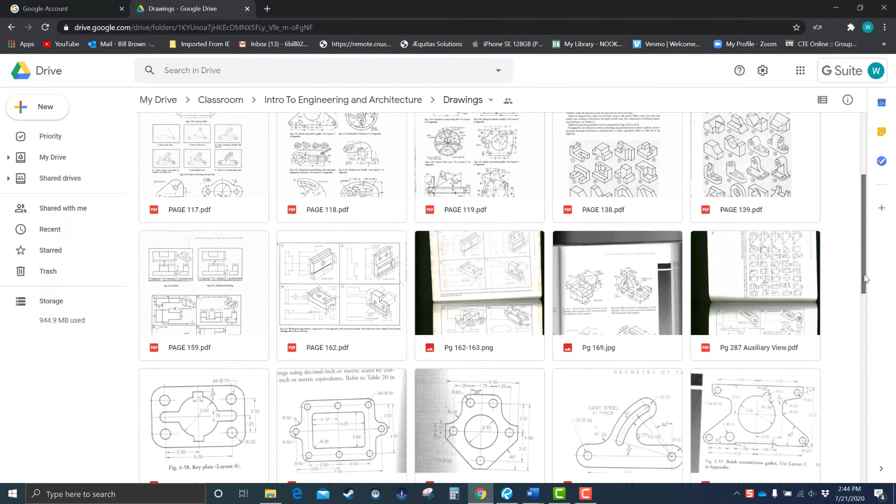As you can see from my screen here, I'm on the Google Drive. I've got a picture of it in here somewhere. It'll say S2, the Key plate. You can see it right here. Sometimes that comes out kind of small, so I've also got this as a PDF.

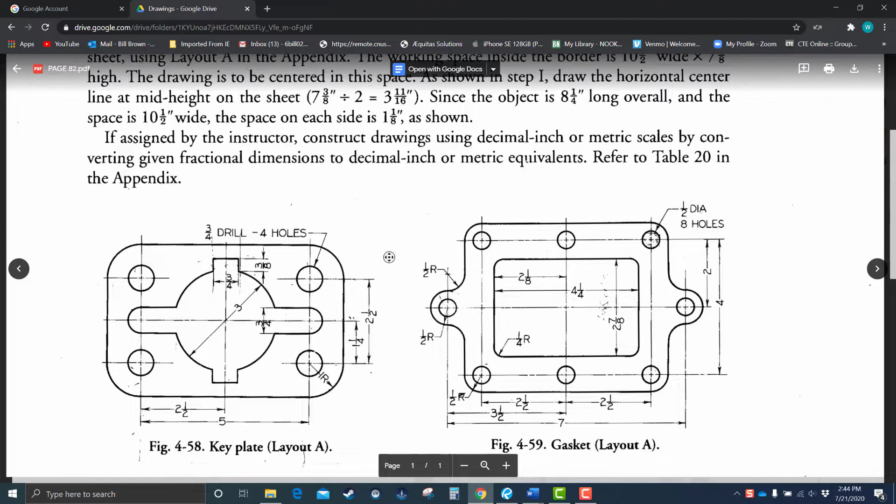So if you go to page 82 on the PDF, I'm going to open it that way because I have the ability to scale and move around here. So when I open the PDF, I can zoom in on that thing and pan around. I'm not panning around very well right now. Let's see... there we go. Okay, so I'm not used to the software.

All right, so we're going to do the Key plate right here. Pretty easy to see here. The numbers are there just to help you with the proportions and stuff like that. So here we go. I'm going to kind of go back and forth with the picture here.

So let's go ahead and get into the software here. So this is the assignment sheet. So this will be what you're looking for right there, the S2.

All right, so let's see. Let me just zoom out just a little bit here. Okay, so if we look back at the part, you're going to notice that it has a natural center point to it. If you look at the part here, we're going for this bullseye right there. So it does have a natural center right there, and we're going to use a center line to do that.

So let's go ahead and pop in here. What I'd like you to do, use a 0.5 or 0.7 here. I would use a 0.5 pencil on this. So I've got my 0.5 right here, and I'm just going to find the middle of the paper.

And we're just going to make a nice light vertical line here, nice and light. You just want it reasonably straight, doesn't have to be perfect. If you don't overthink it, it should be equal on both sides.

And then we're going to do the same thing going horizontally. So we're going to make a line right down the middle there, really, really light, just so you can see it there. Okay, just like that. So that would be our natural center point of the part.

So again, that's our bullseye kind of right there. Now this part has a series of bullseyes, and that's kind of the way we're going to set this thing up. We're going to proportion it, if you will. So what we see right here is a 2.5 and a 5, which means it's 2.5 one way and 2.5 the other. Now we're not going to measure—this is a sketch, but we're going to use these as proportions. So that said, let's go ahead and do that.

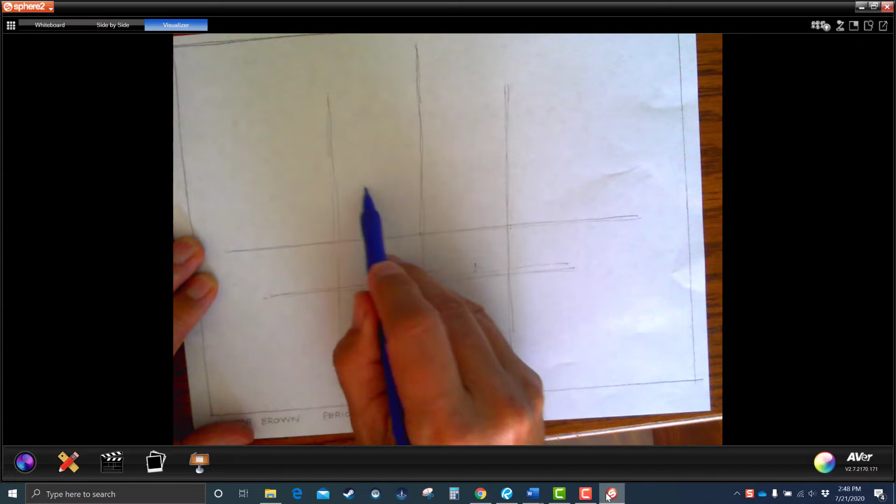Something about like that—it's your job to check does that look like it's about half of that? If it looks pretty close, you're in good shape. And if it doesn't look good, if it looks too much like a square, then you need to change your proportion and get this right.

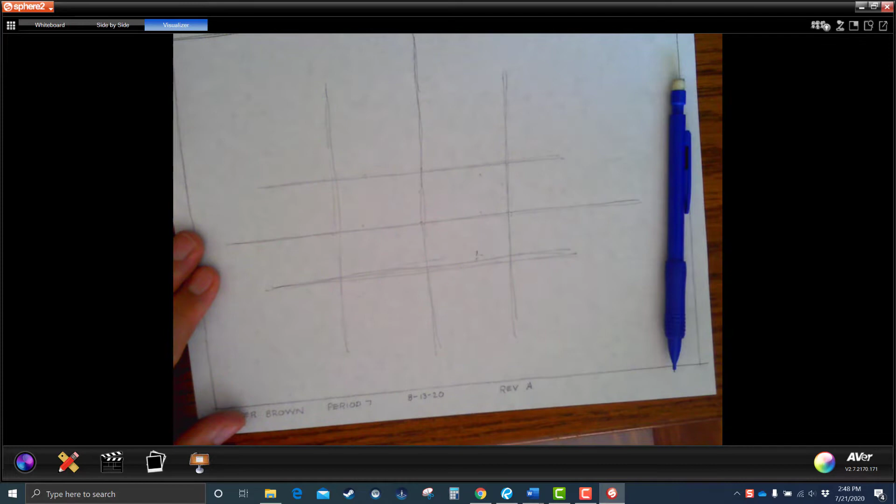You'll notice I have several lines here. Don't worry about it, I'm looking at the one I think is the good one and not worrying about the other ones. So you don't need to erase at this point. Okay, back to the picture—you can do these things in whatever order you want.

I'm going to go ahead and make this big 3-inch circle first. You'll notice if I make the circle, it looks like it will go a little bit lower than this center line coming horizontally from this circle right here. So I'm going to think about that as I do this. Same thing up here—it's going to go a little bit more, not a lot, but a little. That's going to help me with the proportion.

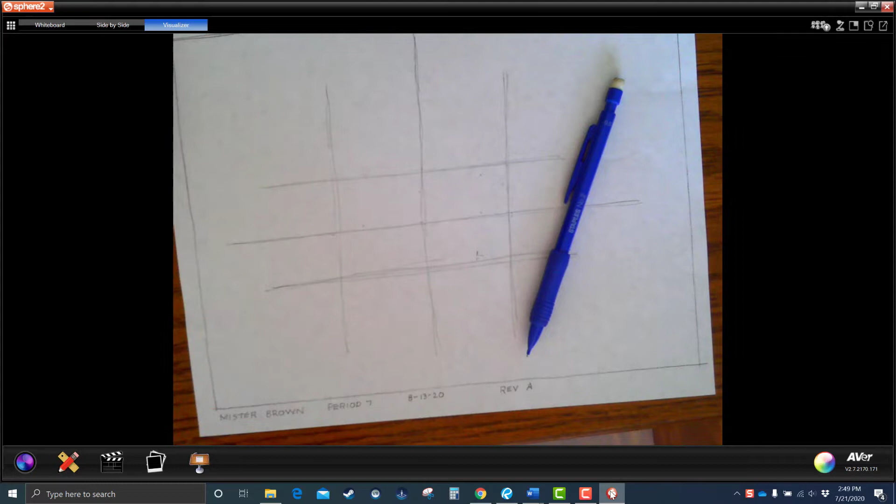Looking at that, I think as this circle goes up it's probably going to hit around there and there, something like that. So what I want you to do is make what's called a free circle. They do this a lot in both engineering and architecture. The idea is we want to make a circle—the center's going to be here, and it's going to hit these two points.

Now, as I do this, you can see that if I make my circle like this, based on the shape here I am not going to make a good circle. Or if I go like this, I'm not going to make a good circle either. There's no way if I put a line down there that would be a good circle. However, if I just get it going there and look about where it's going, that's feeling pretty round—I just drop my pencil down, nice and light.

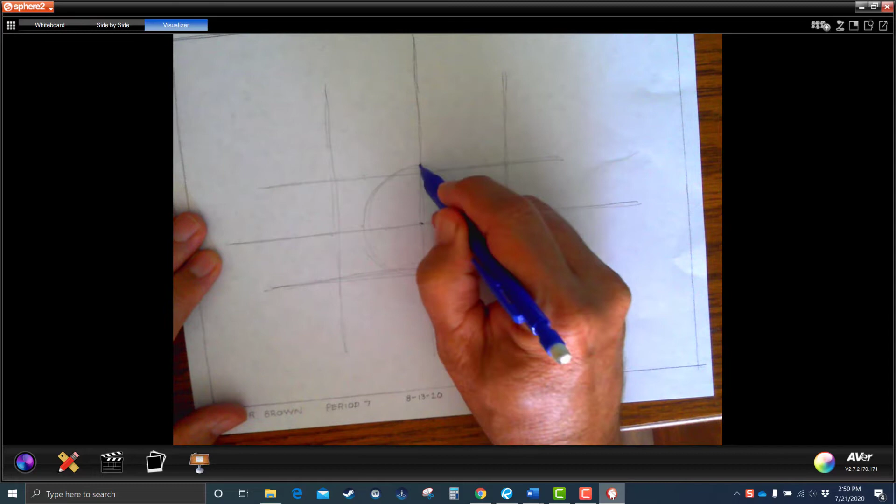I might not hit it the first time, but I hit it the second or third time. The first one I didn't really like, but the one that came out a little farther I do like. I'm going to go ahead and darken those a little bit here—not completely dark right now, just darken the lines I like a bit with the 0.5. So you get your circle—it's proportional, it's pretty round frankly. Looks like an egg, you fix it.

All right, let's go back and look at the picture. Next, let's go ahead and create these holes. What we have is this 3/4 drill, which means it's a diameter of 3/4, and there's 4 of them, which makes sense, right? There's 1, there's 2, there's 3, and there's 4.

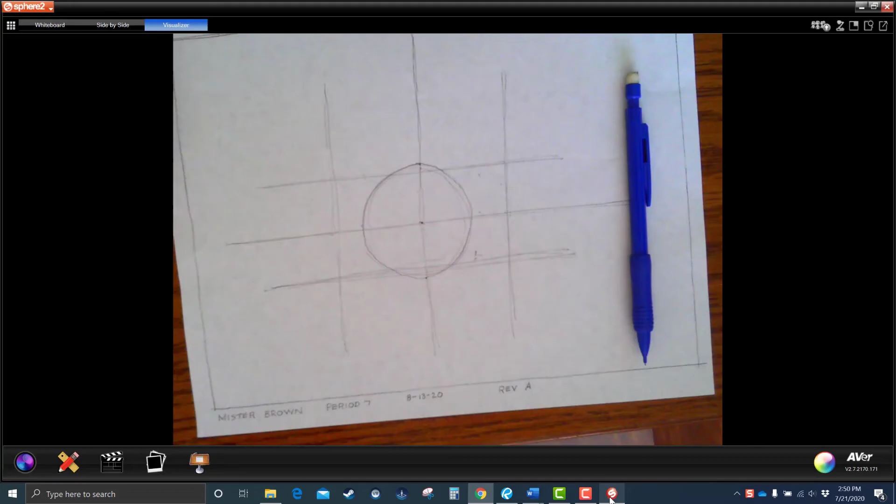So we're going to make those. We already have the center points on them, so we're just going to eyeball the size based on the proportions we have and plop them in. These are going to be easier than that big one right here—we're just going to go ahead and plop those circles in.

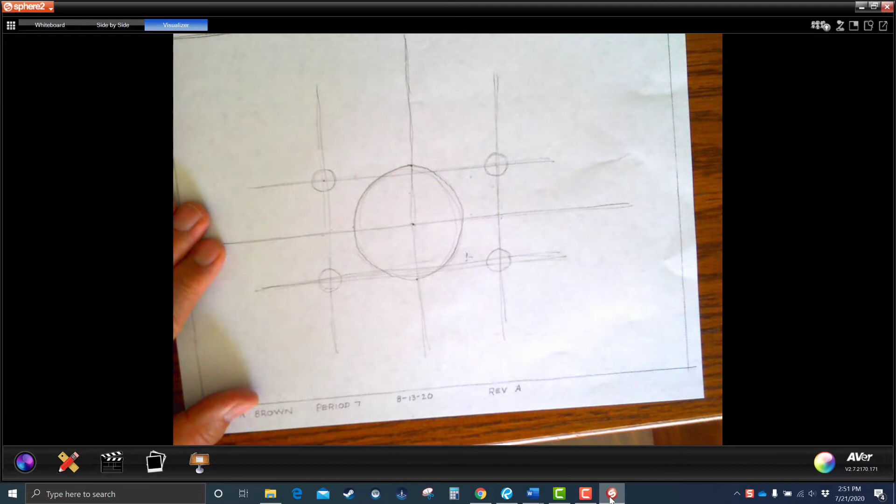I don't know, maybe something about like that. I'm going real light on these, that way if I mess it up I can either erase or just make it darker and go a little bigger or smaller. Try to keep those the same size, and right in the middle, make those bullseyes right in the middle of your circles. You can see I'm going really, really light on these.

Next, you'll notice that this 3/4 here means the distance from this top line to this bottom line is 3/4, which is actually the same size as those 4 holes we just made. So we're going to put 2 more of those free circles in. Now I know there's only a half circle here and a half circle on this side—we're going to make it the complete circle, but really light.

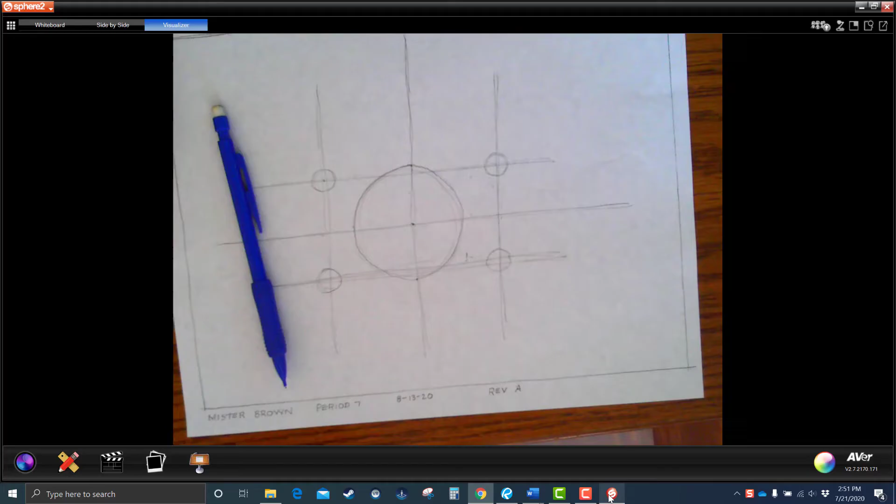So I want you, when you do these arcs, to make free circles out of them, but we're only going to darken half of it. We're going to go in here, try to get them all the same size, kind of like that. Again, we're not going to use the half side that's closest to the big hole—but again, we don't worry about that.

As you do these sketches, you can put them together however way you want. You can see now that there's horizontal lines that attach the 2 we just did to the circle. You can put those in now or later—it doesn't really matter what order you do these things in. Since I'm there, I'll go ahead and do those now. I'm just going to take a line, nice and light, and drag it in. If things don't look good, you can always change your proportion now before you darken everything.

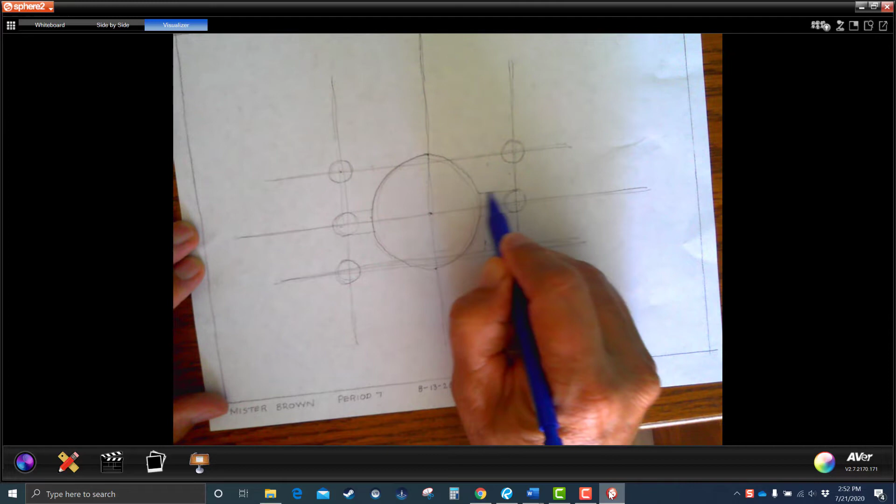So you have to kind of do a little self-evaluating and just see if it looks right. Does it look in proportion, or does it look like it's too skinny or too fat? Looking back at the part, that's probably okay. If yours looks too fat or too skinny, you can just move that center line a little bit to fix it.

Okay, now what we're going to do is we're going to deal with these outside arcs right here. Now these outside arcs have a 1 radius, which means they're a 2-inch diameter. So definition of radius is from the center of the circle to the outside. So 1 inch in radius, 2 inches in diameter, 1-inch radius.

It's pretty big. In fact, if this circle were going to come around, I want to say that it's probably going to hit pretty close to the bottom of that groove we got right there. Might even go past it a little bit, but at least pretty close to it. All right, and I think that on all 4 sides.

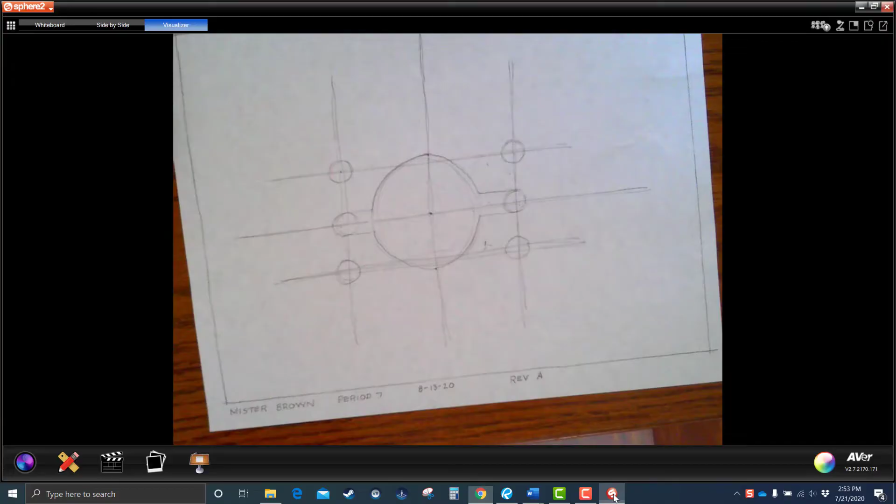So let's do that. I'm going to put the free circle in. A pretty good sized circle here. Don't worry if it hits other stuff because we're not going to use it anyway. I'm going to say something like that. If you make this circle too small, it's going to be a problem.

And try to make that the same size using the free circle, using this as a center point. Almost looks like a tire there, huh? Those are concentric circles. Now, as you make this, see if you can try to make these line up, because

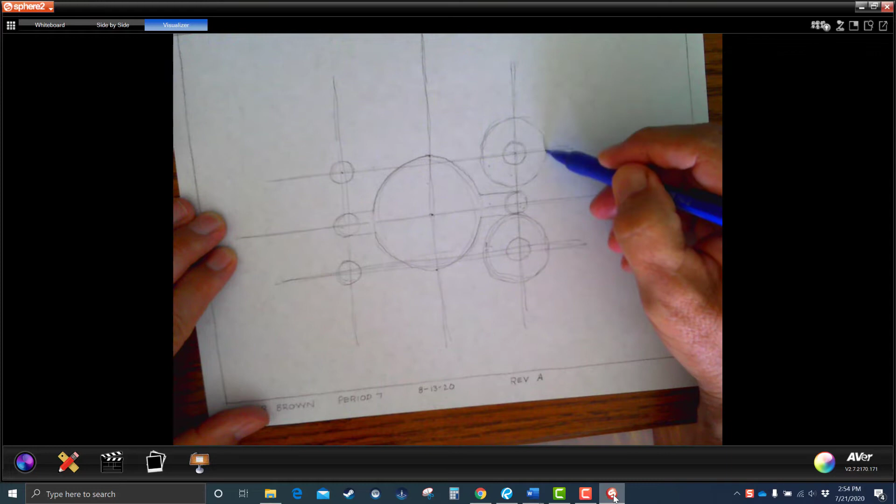we're going to eventually have to draw a line straight down. So you can save yourself some headache later on by making these line up with each other. So I'm looking at these, looking at, does that line up? I don't have to worry about that yet.

And then the hardest one's going to be the last one. So we want this to line up with the top one and to the one to the right. So I'm just, again, almost making the wheel. And again, does this line up with this? If it doesn't, you need to move it up or down, then you need to do that.

Don't worry if there's a little bit of space here, a little bit different than that. It's a sketch as long as these lines are lining up. However, if they don't line up, if you take this and you go across like this and it's not lining up, then you might have to move your circle down a little bit. This line should be straight. So you can decide if you want to lean it a little bit, which I don't want you to do.

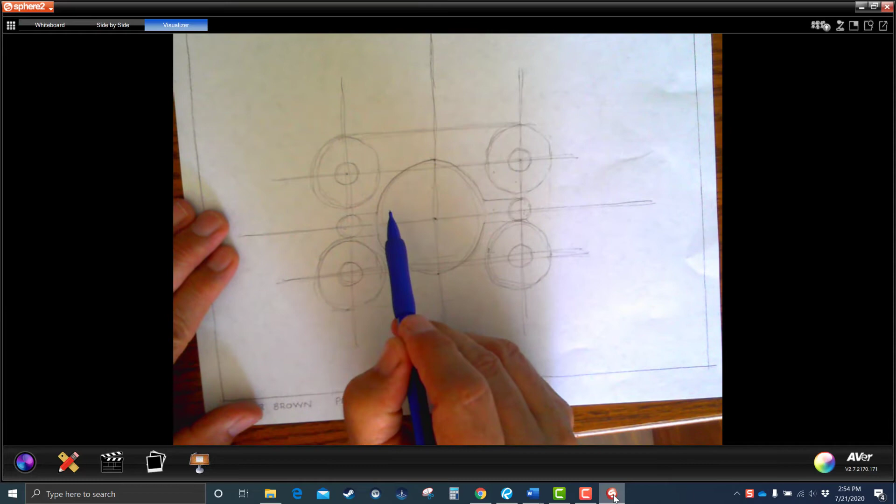So as I'm doing this, I'm coming straight across. If they're hitting tangent, flowing into one spot, you're cool. And if not, you're going to have to go back and move those circles a little bit. It's very likely you're going to have to move the circle a little bit if you don't like the way it's going.

So looking at mine, that doesn't look too bad. It's, it may be leaning a touch right here, but I think close enough. Again, don't worry about these larger circles inside. They're not going to really be part of it anyway. And don't worry about this touching up here.

All right, let's go back and look at the part. Okay, so the next piece we have are these grooves right here, these rectangular grooves. You can see the 3/4 and the 3/8. So they're kind of little wedges, if you will. Those are going to be pretty easy. So let's go ahead and get those going.

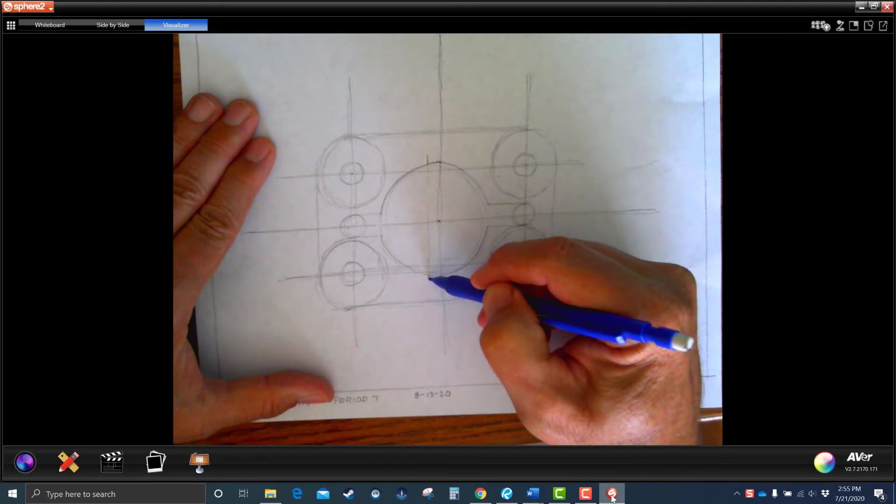So looks like it comes about here. Now when I do this one, I want you to very lightly bring that down and do the bottom one as well. I want to see that projection line here. So you're telling me as a designer that those two things are aligned with each other. Same thing over here. Bring that projection line down nice and light, and then like so.

And then bring in the groove. Notice I really haven't erased anything yet, which is exactly the way I want you to sketch it. Okay, so once you've got your geometry in, if you want to go in there and just, do a little, just lighten a little bit, that's fine. But just to make sure your proportion looks okay, look back at the part.

Yeah, mine's probably right. I probably could have gone a little higher on that, so I think I'm going to do that. I don't think mine's quite high enough, so I'm just going to just bump this up just a little bit there.

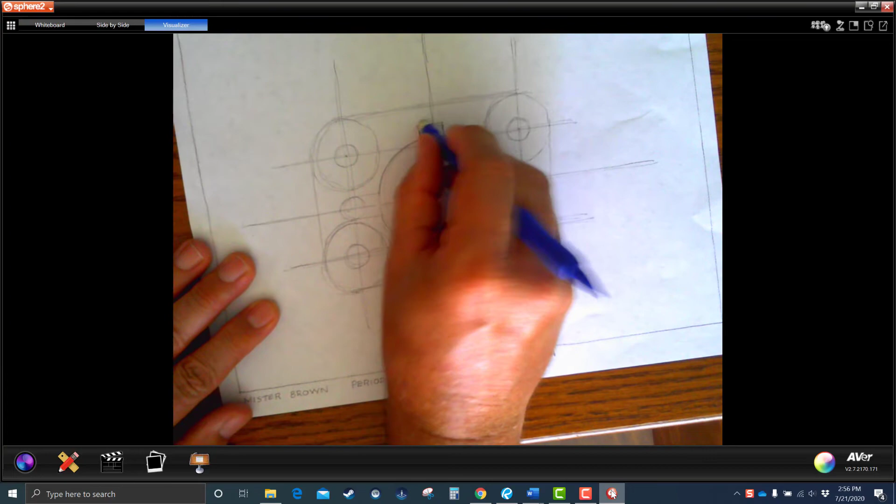I think this one's okay. I think that top one just wasn't perfect.

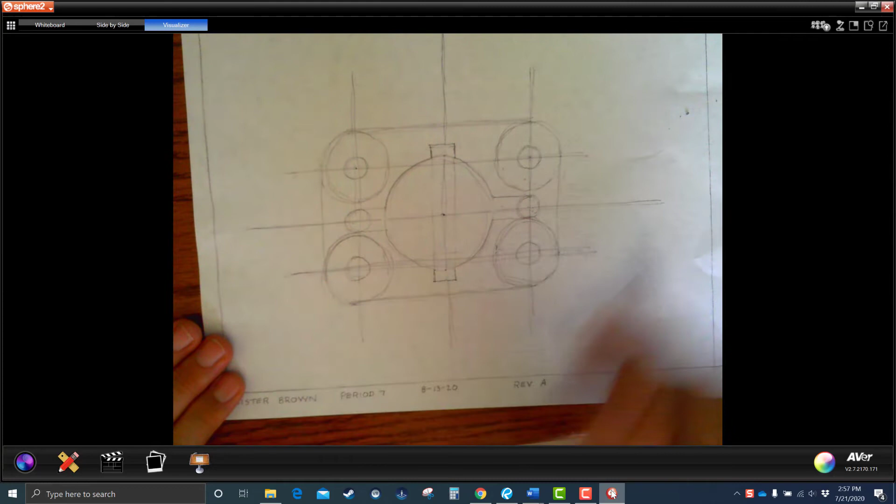I want you to lay them out nice and light, using the center lines first, and then using the center lines for the three circles. Try to get those three circles concentric and then line them up. Feel free to erase if you have to as you're moving these little wheels up and down to make sure they line up with each other.

I don't like darkening at this point. I like putting in the center lines first. So what I would do here is put in these center lines. Now a center line looks like this: long, short, long. That's the code for a center line in the industry.

What happens is they run into each other very frequently: long, short, long. And it creates this kind of plus sign in the middle. So you have really two lines intersecting each other and forming the little plus sign. Problem is sometimes that gap is a little tough to get with a pretty plus sign that looks really good. You don't want the plus sign to look like this, where it's shorter one way than the other.

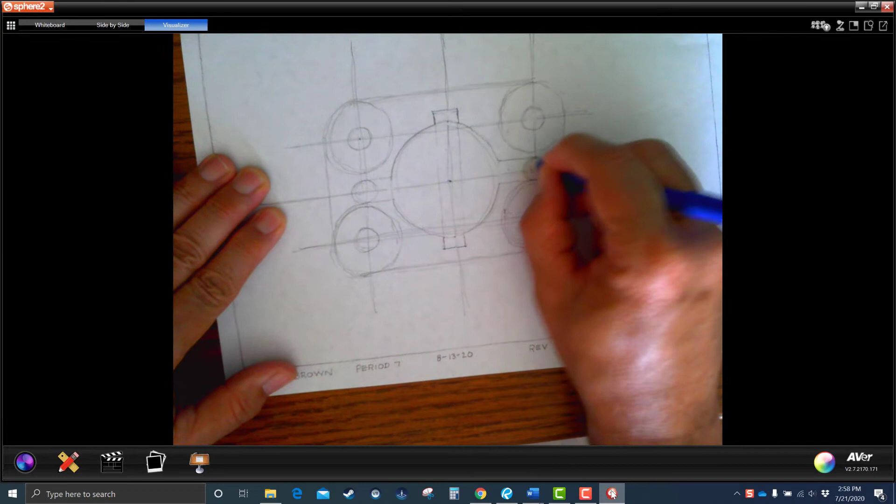So here's what I like to do. With the center line, I'm going to just erase inside here. This is where I like using the small erasers at the end of my pencils if you have it. If not, you can break out your little white eraser. You can erase in here, it's really no problem because even if you hit some of the stuff that's going to stay, we're going to darken it anyway, so it's okay. Get in there.

Here's the way I suggest you do it: make the plus sign first, and do that on each one, like that, and like that, and just work your way around all the centers of the circles. It could even be that the lines you had before, you might have to move a little bit because maybe you just missed them a little bit with your circle.

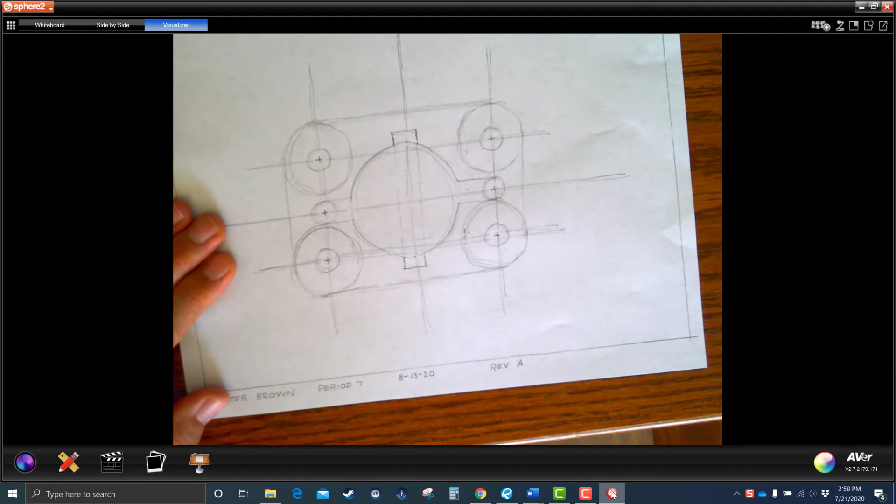That's completely fine. I'm going to go a little bit bigger on the large circle in the middle. What I don't want you to do is go over lines, don't go like this and make kind of double lines. If you make a mistake on a line like that, just erase it and make it again. Don't go back over your lines to darken them, especially the center lines, the thinner lines. These should be with the 0.5 pencil, so the lead's kind of thin.

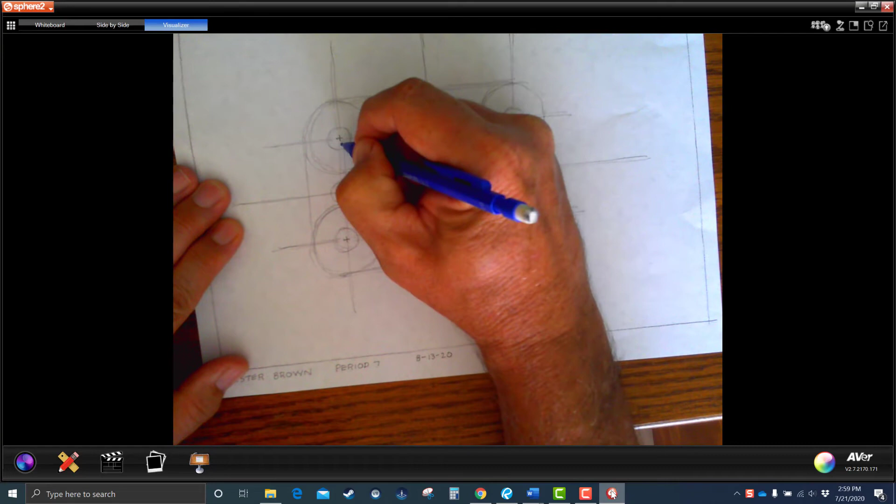Then what you're going to do is just connect them up with a gap. Notice there's a gap between the center lines, so the plus sign doesn't touch this line. And then this line goes all the way out past the part, just a little bit like that. So you just work it around, work it out to here. Notice it's just going past the arc here.

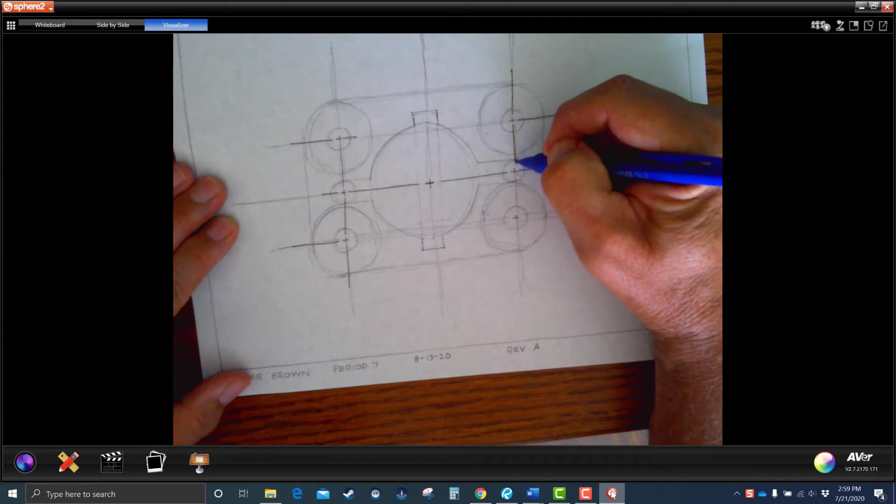We're doing this one all the way out because it's being used for this arc as well. We're going to go out here just to there. This one's going to come all the way in and come all the way over. Let me just go kind of quickly here. There's redundancy here, so they all kind of do sort of the same thing. Connect them all up. You want to get in the practice of going reasonably quick so you're not wasting a lot of time. Something like that. And then I missed one over here.

So do a little self-evaluation and make sure you've got everything there. The arcs should have the two lines. And then the center line goes past the circle by about that same amount, past the circle, past the circle, past the circle. Looks like I missed this one here. I'm going to go straight up and straight up, so I'm going to make this somewhere between the groove and the end line right there. This should be, again, with a 0.5 pencil.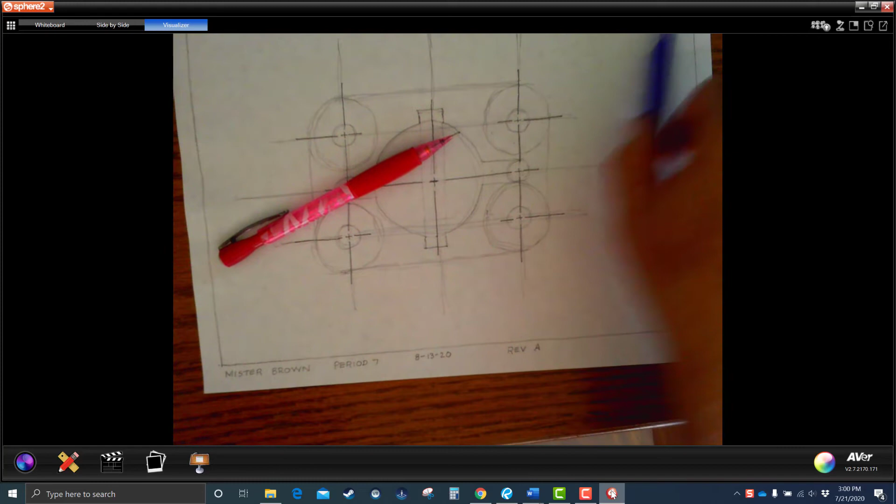Then what you're going to do is take your 0.7 pencil, which is a wider lead, and this is going to give us a little bit more pop on the object lines. These are called object lines, and they're the main part lines, if you will, the edges of the part. It's easier for me, not smarter, but easier, to do the arcs first. It's easier to connect a line to an arc than to connect an arc to a line. I'm going to spin this around because you can do this however you want. I like going kind of on the down cycle here, but again, you do whatever's comfortable for you.

So I'm doing the arcs first, and then I'm going to connect them. Now, when you do these, you want to just say, touching, touching, touching, and then go for it.

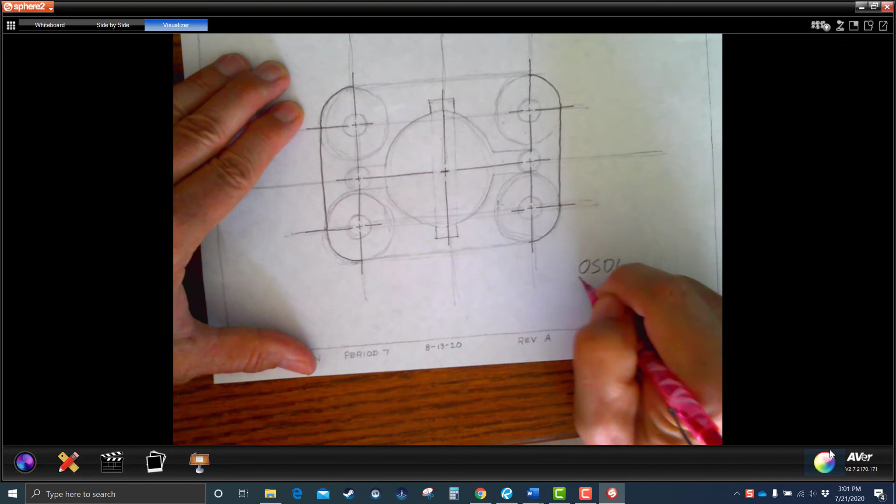One solid dark line, OSDL. That's one solid dark line. If I'm not liking what I'm seeing on your sketch, you'll get that noted, and you'll have to go back and fix it.

What I don't want you to do when you make those solid dark lines is sketch back and forth like this. Don't go like that, we're not in elementary school anymore. They don't do that on sketches. It's just a single dark line, and that's the industry standard.

So no fuzzies. I don't even want you to go back over the line and make it dark that way. I just want one solid dark line. And if you mess it up, erase it and make it again.

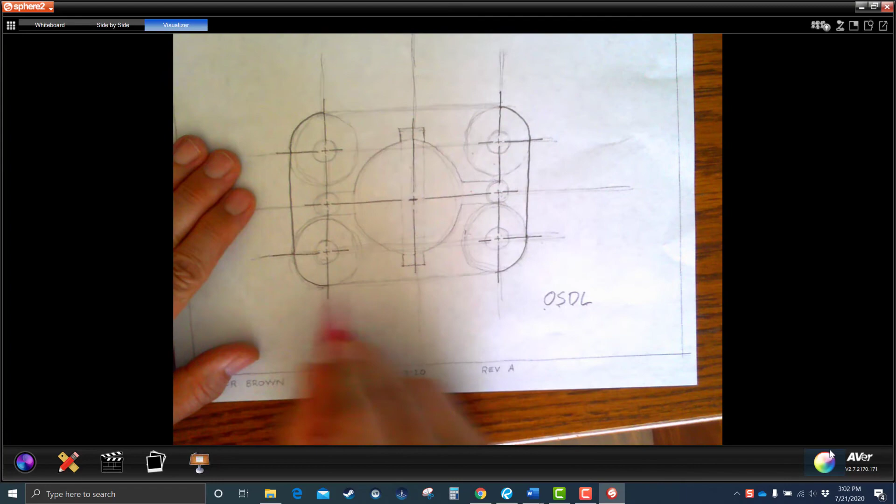I don't do a very good job of going horizontally, so I'm going to turn this thing this way. I like to lock my wrist and either push up or pull down. I'm going to look at those two and just shoot there. If you go too slow, it almost makes it harder.

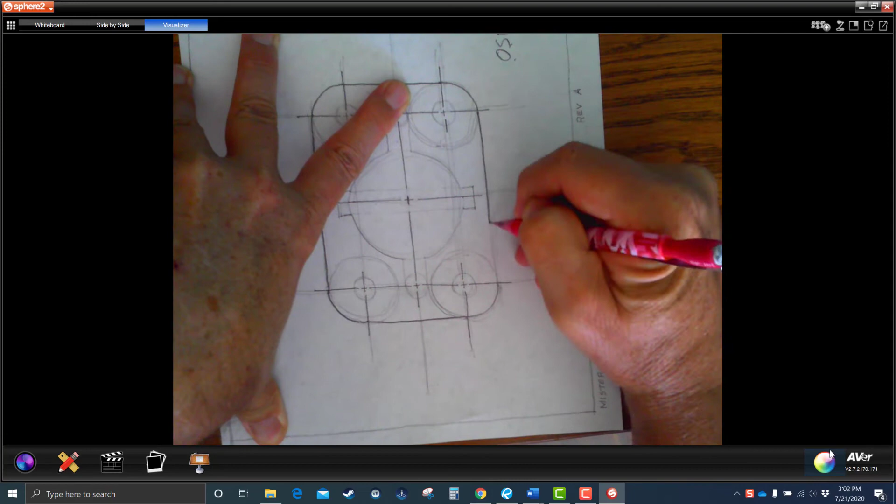You want to make sure that you run into the arc. Okay, let's do the circle. The circles are pretty easy, the small ones. I'm just going to go over my work here: do the arc, do the circle, one solid dark line with my 0.7.

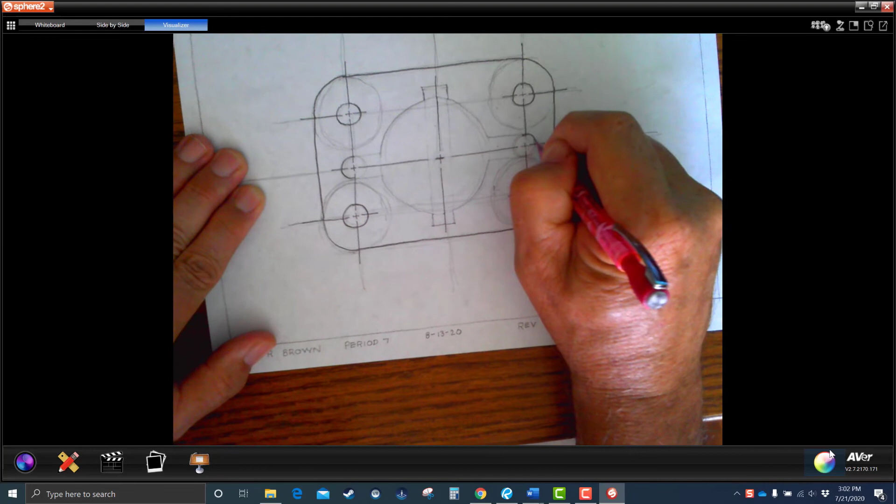Again, if you make a mistake, just erase it and make it again. You will make mistakes unless you're just crazy good about this. Something like that, let's see.

I like making the arcs first. I'm going to go ahead and do this arc. And like I said, I'm not very good at turning my hand there, so I'm just going to rotate my paper around a little bit. And that would be fine.

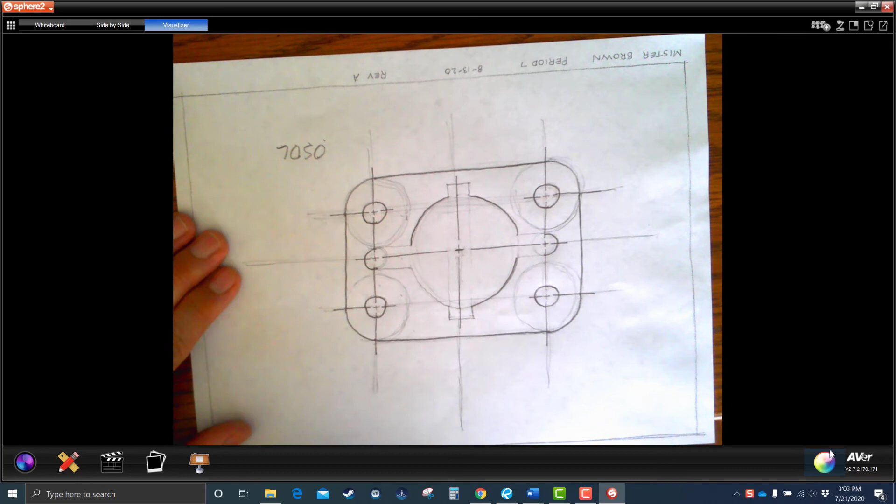If you're working with a client too, that makes a difference. What's going to happen with a client is you'll generally be sketching upside down like this, because your client will be looking at the part right side up, while you as the professional will be sketching upside down. So that's an art you get into later on.

Okay, let's do this last one here. Like I said, do it however you want, whatever's comfortable for you. I'm just giving you pointers as to what might work for you. Make sure there's no gaps.

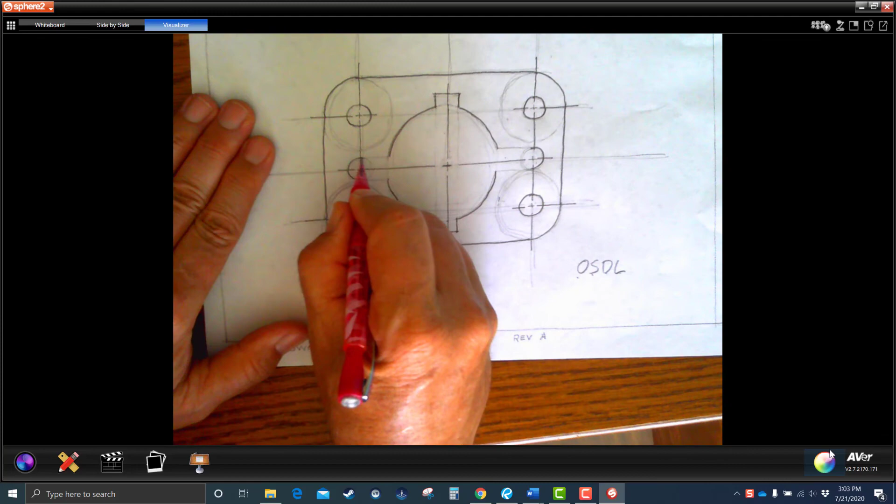We'll go ahead and connect these up. Now, when I make a mistake like that, I don't want to just leave it there. Erase it, and then go in there.

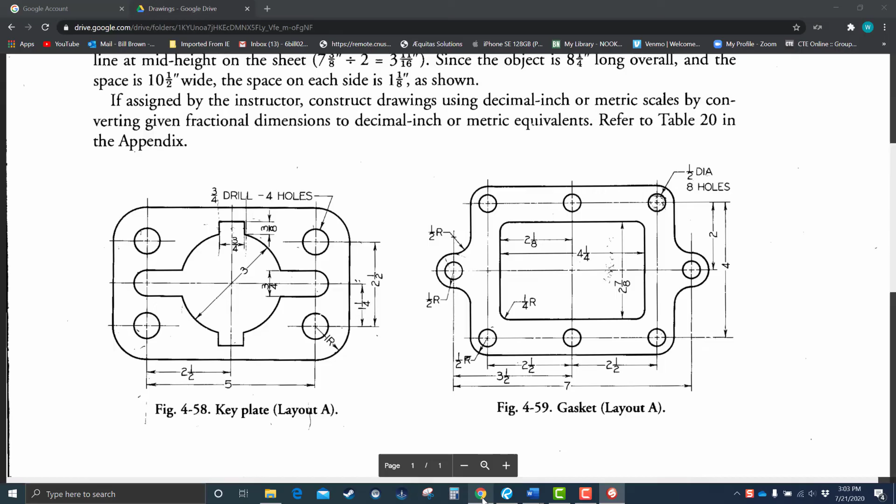Some of the short lines are pretty easy. Now you'll notice that the part itself pops. The part that's actually the good part is the good part, the part that stays. That's what I want to show. So if you're communicating your idea and you see that, it's like, oh yeah, I see what you're saying. That's a gasket.

A key plate, sorry, the name of the part is the key plate. So that's a key plate, and it looks proportional. I can see this has 4 holes, it's got a groove, it's got a couple of slots on the top. That's kind of the idea.

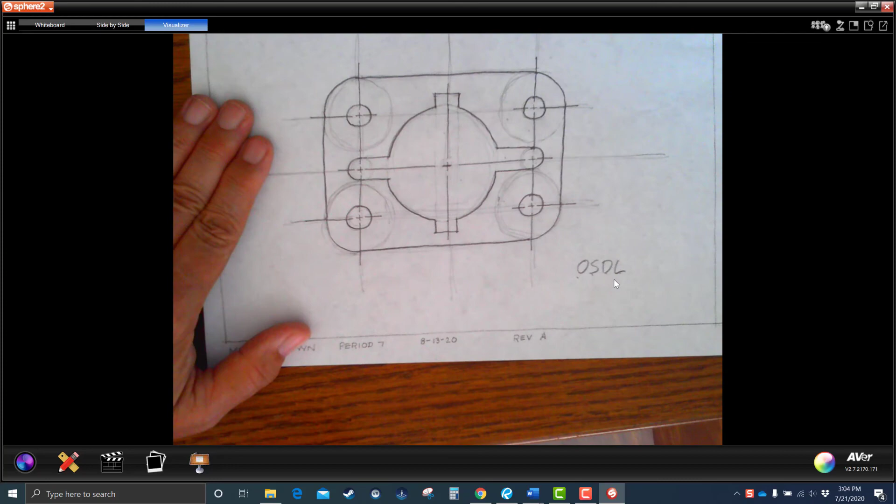I'm going to take this OSDL off. I want you to keep the free circles. I do not want you to erase them. I want to see that geometry the way you've created it. I want to see the concentricity of the circles as you make those.

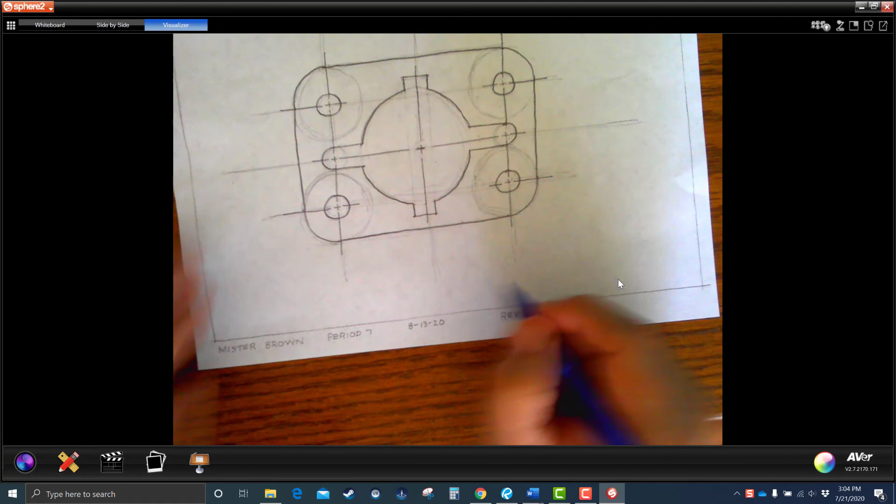So you don't really have to erase so much unless you make a mistake, especially in the dark lines. There shouldn't be any overlapping, if you will. So if you have an arc that goes like this, you shouldn't have something that goes off the line like that. It should smooth into it. It's called tangent, where it's just hitting it in one spot. So make sure you're doing that.

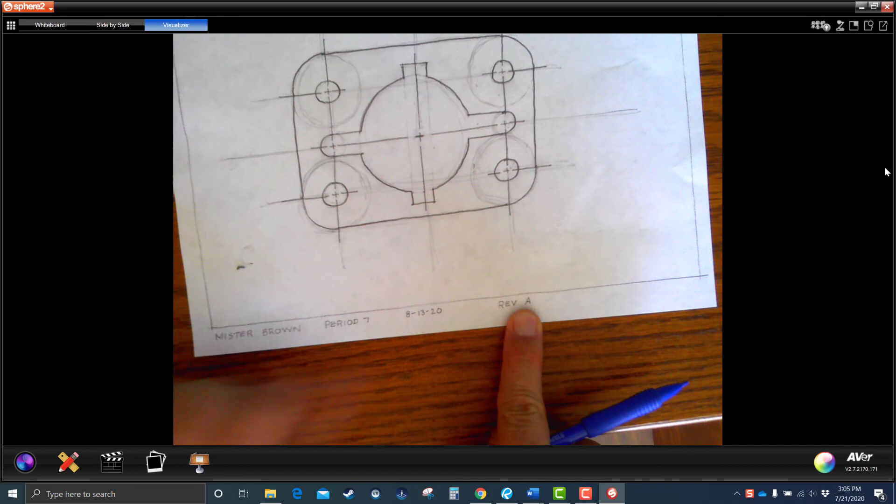You're going to put your name in Gothic lettering, your period, the date you completed it, revision A, and then this one is S2.

So what's going to happen is if you do this perfectly, you'll get a perfect score, and that'll be it, we'll be done. If you don't do it correctly, and I make some comments on it, then you'll have to go back and make the corrections, and then change this to revision B, and then you can turn it in for a higher score. No penalty, but you have to make the corrections, obviously.

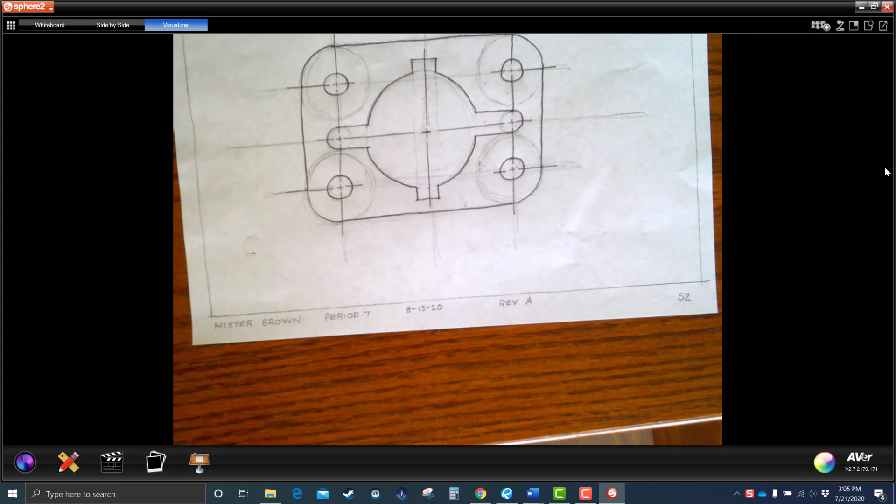All right, and that is it. That is the Keyplate S2. It's on page 82.